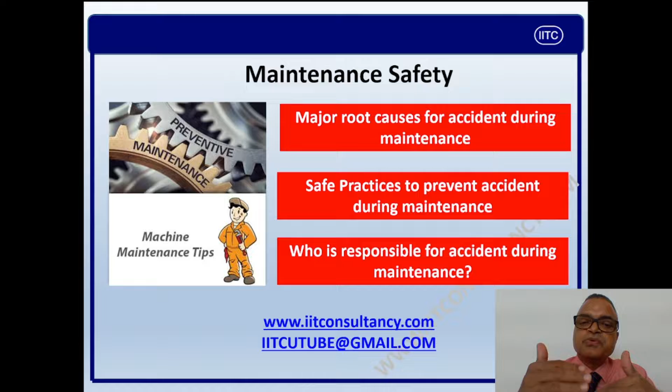Today we are going to see a very important and rather hot topic, maintenance safety. I am very sure those people who are involved in maintenance safety could understand me what kind of dynamic hazards are there, because there are dynamic risks since each maintenance activity is different and each maintenance activity has got their own risk, own set of hazards. So today we are going to see the major root causes for accident during maintenance, the safe practices to prevent accident during maintenance, and who is responsible for accident during maintenance activity.

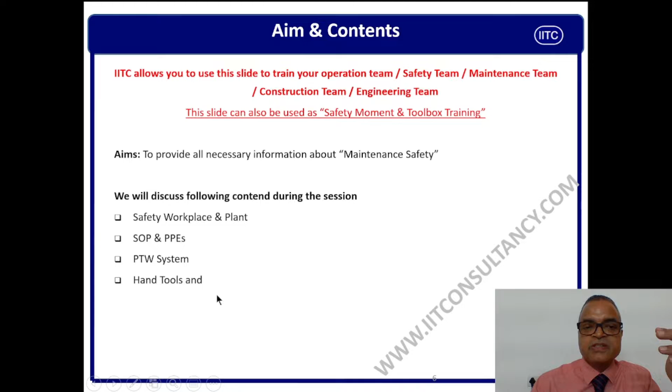You can use this slide as a safety moment and toolbox training when you require, when you need this. So we are going to see the different things, we are not going to read line by line. These are the safe workplace and plant, SOPs and PPEs, permit to work system, and hand tools and safe requirements. Guys, let us be serious now.

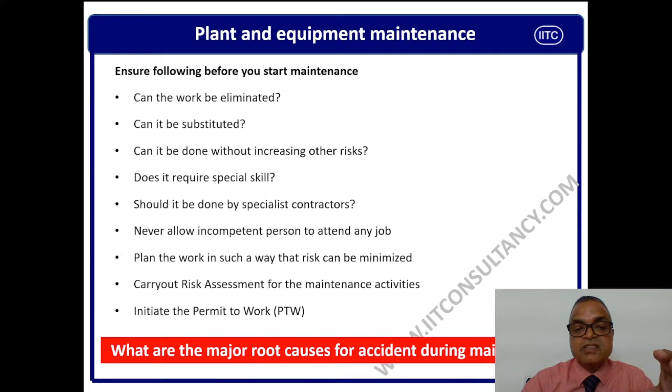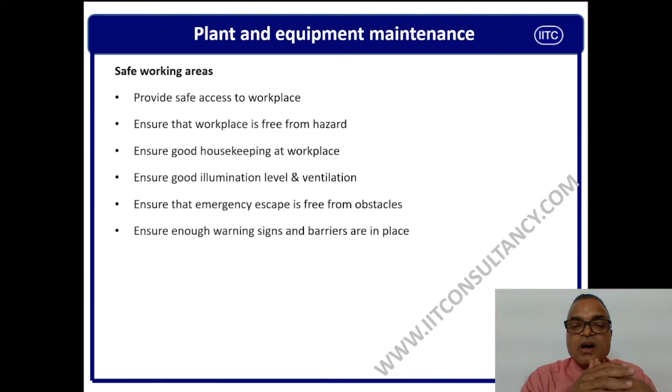Ensure that the emergency escape is free from obstacle. Your maintenance team is working, but they do not know what can go wrong. If something goes wrong, they have to evacuate the place immediately. So in that case, all the escape routes and all the emergency exits should be free from obstacle.

Ensure enough warning signs and barriers are in place. This is called safety communication, hazard communication. Seeing is believing - if you put good, effective signboards and barriers, then people will see it, people will believe it, and people will treat it accordingly.

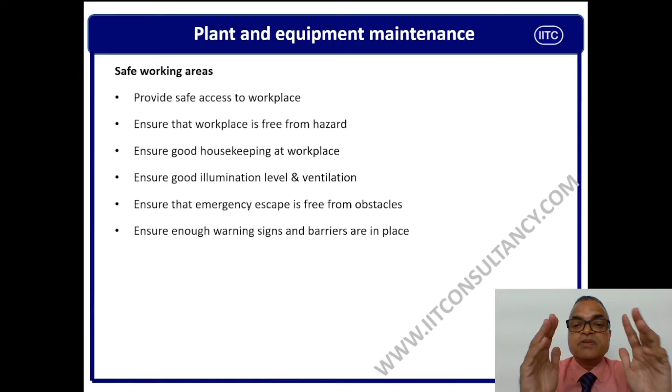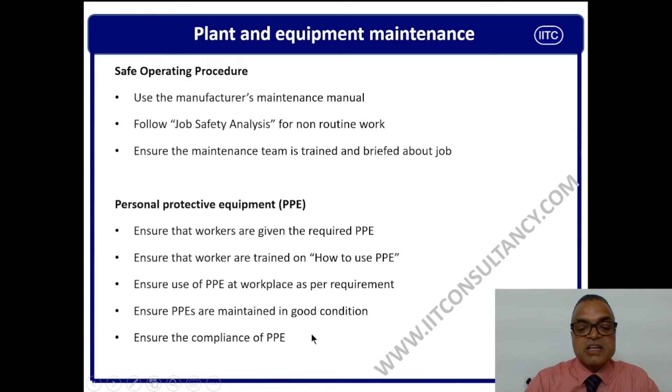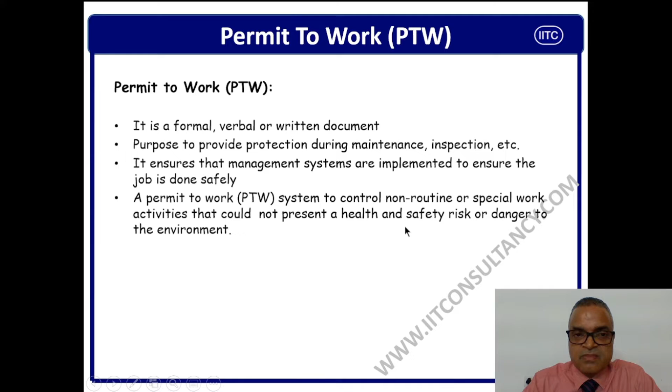The purpose of the permit to work system is to provide protection during maintenance and inspection, and to ensure the management systems are implemented so that the job is done safely. The formal definition of permit to work is a system to control non-routine or special work activities so that they do not present health, safety and environment related issues. So the permit to work is basically the first document to start the maintenance activity. Without an approved permit to work, we should not start the maintenance activity.

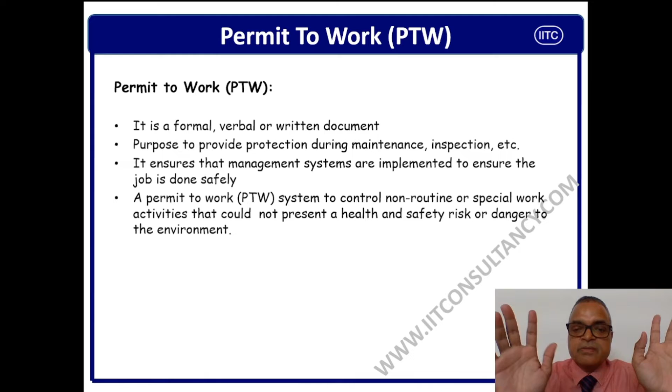Permit is used for non-routine job activity, but sometimes in some companies, for routine activities, for routine jobs, we also use permit to work. But 99.99% for routine jobs, there is an SOP, safe operating procedure or standard operating procedures available.

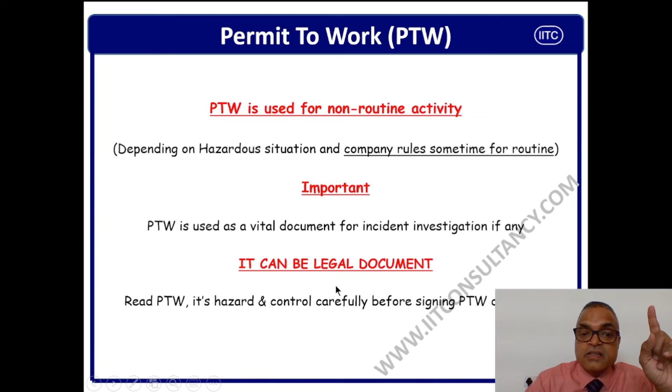Important thing, we need to see that permit to work is a vital document for incident investigation, if any, unfortunately. Normally when an incident happens, we ask for the permit to work, then we go through line by line and we see what has gone wrong, what we have ignored. So it can be a legal document, my friend. So that means read it carefully, read its hazards carefully, read its control measures carefully before signing, because it is a legal document.

There are a few examples of non-routine activities. I will go through line by line and a few I will explain. Welding, cutting or grinding in presence of flammable material. When you are going to do welding, cutting and grinding in presence of flammable material, it is a non-routine activity, we must evaluate the risk, we must do the SIMOPS, then only you start the work after taking the permit. Any activities dealing with explosives are also non-routine activities. This has to be under control under permit to work.

High pressure jetting. This is a very critical activity. I have seen people dying in high pressure jetting because the pressure is 1600 barg, 2000 barg, and it can cut your neck, it can cut your limbs, it can cut your head, it can cut anything. Be careful. Grit blasting is also one of the non-routine jobs we must control under the permit to work system. Pressure testing, whether hydro test or pneumatic test, has to be controlled under the permit to work.

Breaking into pipelines or hoses containing residual pressure or hazardous chemicals. If you have a pipeline which is having high pressure or hazardous chemical, this must be taken as a non-routine job. This must be controlled under permit to work before removing the flange. Electrical isolation, energy isolation to allow maintenance or repair must be controlled under permit to work. Working at 1.2 meters or above without edge support, without hard barricade, without handrail must be controlled under the work permit system or permit to work.

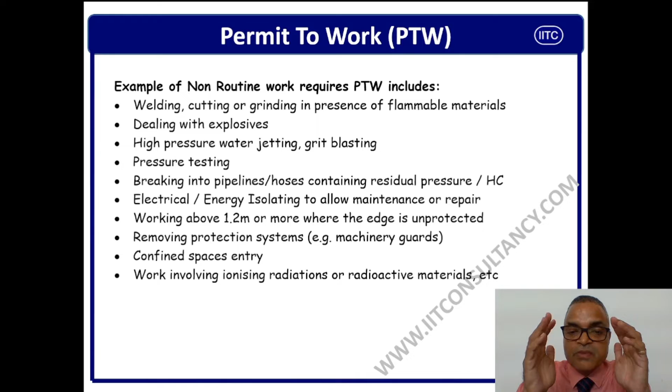Removing protection, safeguards, inherent safety, lifeline, controls or sensors must be controlled under removing the protection. Confined space entry must be controlled under permit to work. Work involving ionizing radiation, X-ray, must be treated under the permit to work control system, and I have prepared one program for this subject, called radiation safety. If you are directly or indirectly related to X-ray, then please go through this material. It will save you, it will protect you. This is a 10 minute program.

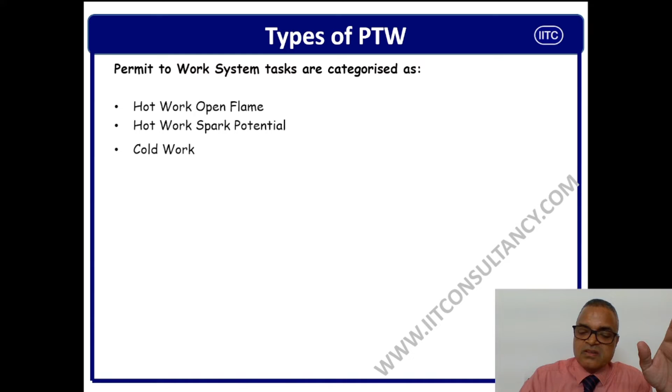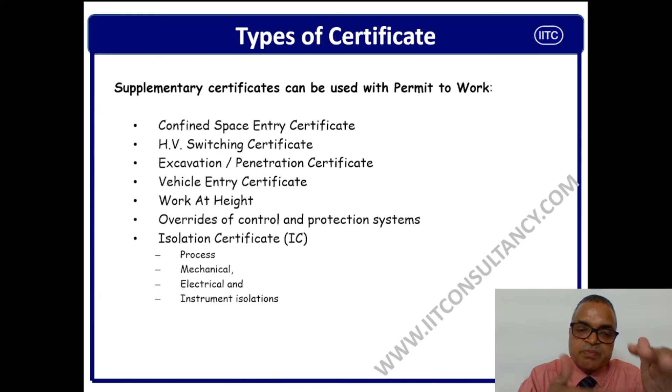Guys, there are three kinds of permits: hot work open flame, hot work spark potential, and cold work. Normally there are many more like work at height, confined space entry, energy isolation. So as a good practice, you can keep these as separate certificates, and these are the major three work permits. But there is no loss, no problem. These are the supplementary certificates: confined space entry, high voltage switching certificate, excavation and/or penetration certificate, vehicle entry certificate, work at height certificate, override of controls and protection certificate, isolation certificates: process isolation, mechanical isolation, electrical isolation, and instrument isolation. These certificates are to be used as an addendum of the hot work or cold work. If you have this as a permit, no harm. Only thing, review the permit with all the checklists, so that you don't miss anything by mistake.

There are three steps for a permit to work. One is initiator or request. Who is going to do the job? He will initiate the permit. The permit has to be reviewed, and after the permit is reviewed, it has to be authorized by an authorized person.

Permit to work is to ensure that there are some activities where two activities cannot be done together, because when you do two activities of different nature, this will probably bring additional hazard and risk. Say for example, there is a pressure vessel or a tank, and you are purging this tank. This tank has got a flammable mixture, toxic mixture, and you are allowing some hot work nearby. What will happen? You are providing the flammable mixture, oxygen is already present in the atmosphere, and you are providing the ignition. You are completing the fire triangle. So this should be avoided. This has to be reviewed under SIMOPS.

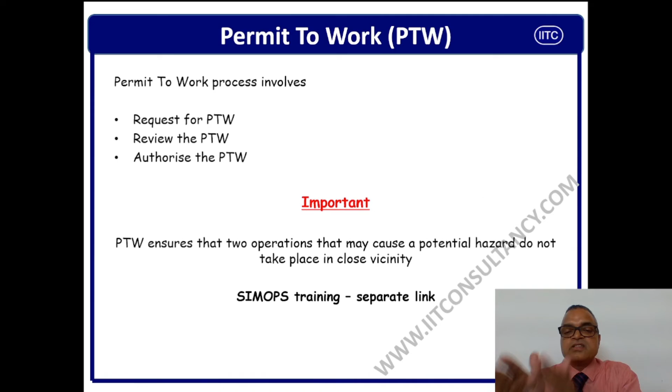What is SIMOPS? SIM has come from simultaneous, OPS has come from operation. This is SIMOPS or MOPO. SIMOPS activity or MOPO activity has to be done separately. There is a workshop for SIMOPS; I have created a separate program for SIMOPS or MOPO. What is MOPO? Matrix of permitted operation. In this matrix, what operations are permitted together and what is not permitted together, this we have to know before starting any job.

Guys, let us see safe plant. For maintenance, plant and equipment must be made safe before maintenance activity. Say for example, if you are planning to go inside the boiler bay for inspection, the boiler has to be shut down. After that, the temperature has to be brought down. You have to remove all the flue gases, all the unburnt carbon, and then you have to do a confined space entry permit. You have to make continuous airflow so that there is no hazard. Then only you can go inside the boiler bed.

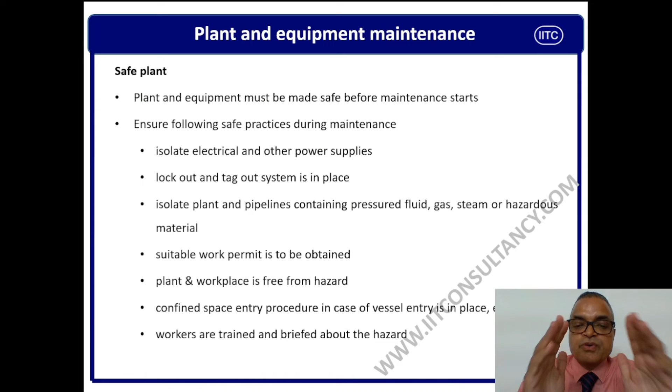Ensure the following safe practices during maintenance. Isolate electrical and other power as per the certificate. Lockout, tagout must be done as per the electrical permit system. Isolate the plant and pipeline containing pressurized gas, steam, hazardous chemicals. A suitable work permit should be obtained before starting the job. Plant and workplace must be freed for the maintenance. Confined space entry procedure has to be followed for vessel entry or any confined space entry. Workers are trained and briefed about the hazard. These are very simple and short points we need to know before starting any maintenance activity.

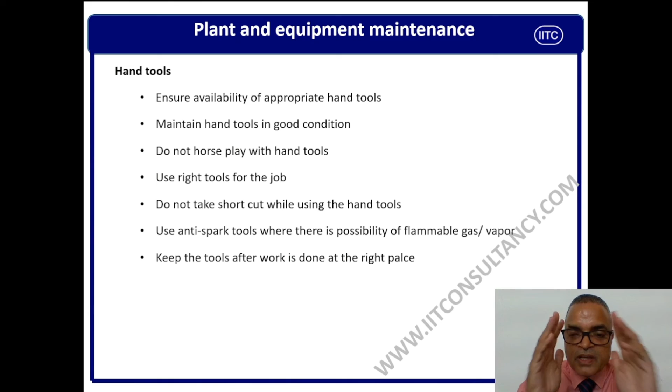These are about hand tools. Normally, if you are using the wrong hand tool for the wrong job, you will end up with an accident. Ensure the availability of proper hand tools. Always use the appropriate hand tool for the appropriate job. Maintain the hand tools in good condition. Do not horseplay with your hand tools. Always use the tools as per the procedure. Do not take shortcuts while using hand tools. Always use anti-spark tools where there is a possibility of flammable gas mixture. Keep the tools at the right place after maintenance. These are the basic things we need to follow, because the right hand tool in the right place with the right job will not create any accident.

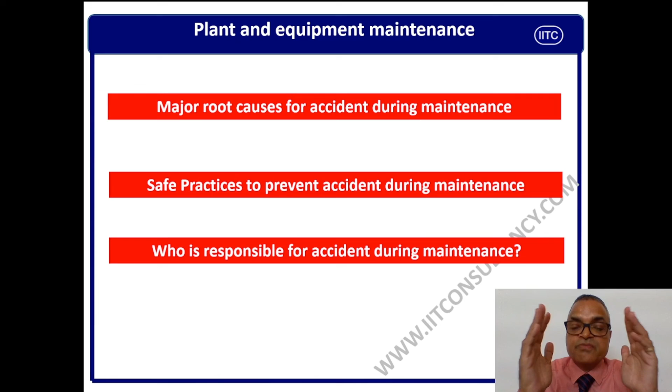And guys, I am very sure now you know the major root causes for accidents during maintenance. Close your eyes and try to recall what we have learned and try to answer. If you are not able to find the answer, please revisit and I'm very sure you will find it. Safe practices to prevent accidents during maintenance we have seen. Who is responsible for maintenance activity? We are responsible. Who is responsible for accidents in maintenance? We are: maintenance manager, safety manager, safety supervisor, maintenance supervisor. That is why we should not take any shortcut. We should plan our maintenance very well so that there are no issues.